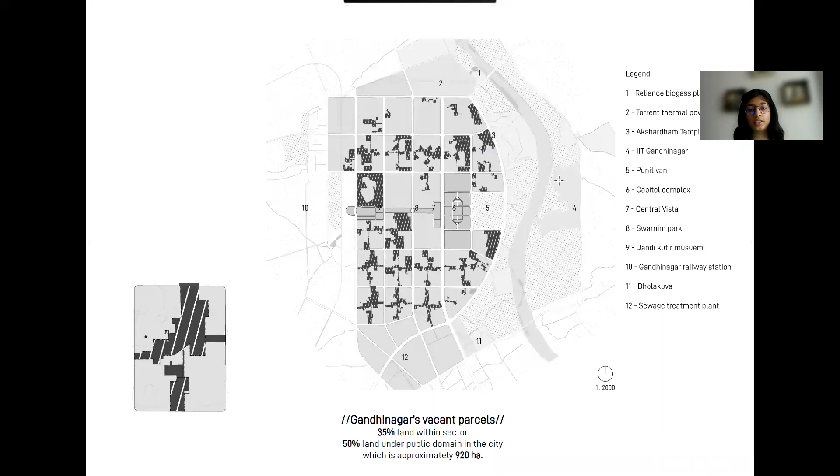As you can see in the map here, Gandhinagar has almost 50% of its land under public domain, and most of this land is clustered in the center. As per the Gandhinagar DP, all the public land within the sector is divided into 5 different zones: educational, religious, amenities, and green spaces, which comprise gardens and parks. However, it is not well defined what can come up within these zones.

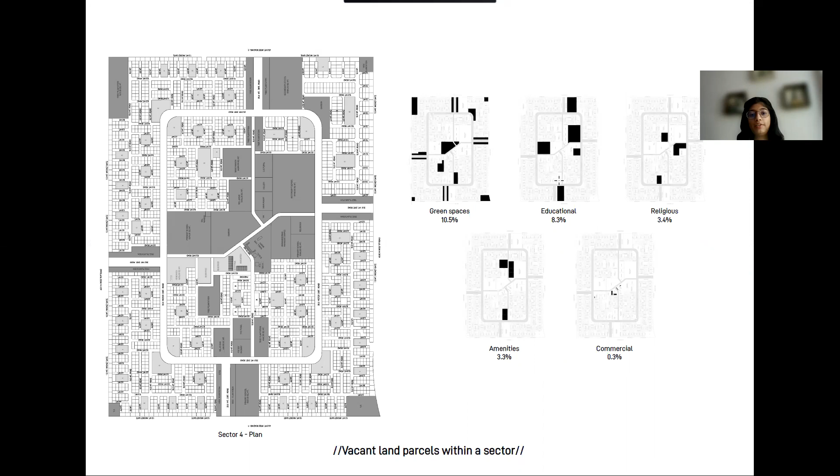To understand this better, I went to the parcels to see how they have been further developed. These are images from one of the most developed sectors, sector 4. If I look at these public lands, many of them are underutilized and sometimes even partially constructed, or they remain undefined in terms of their usages. Also, in many instances, the construction on this land was not more than 100 square meters, and the rest of the land lies barren and unutilized.

However, I also saw other inventive uses of public land by people themselves, which had me thinking: what if the zones currently allocated in the DP were different, or how these uses could themselves become clues for the development that was needed? For example, a sports ground developed by a local community on land intended for a different use, or spaces used for shelter by migrants. Similarly, I also saw vacant land utilized for food gardens and for grazing purposes. This also embeds clues of how to develop land creatively for people to utilize them.

So based on this understanding from the above usages, my concept was to define them better and expand on the current public land zoning. Therefore, the new updated zones are agricultural, ecological, cultural, social, and market. Under each zone, I have mentioned the kind of landscape as well as the supporting infrastructures that can be developed on these land parcels. For example, under the ecological zone, you have forests, parks, wetlands, or remediating landscapes which can be developed, and under supporting infrastructure you have seed banks or nurseries.

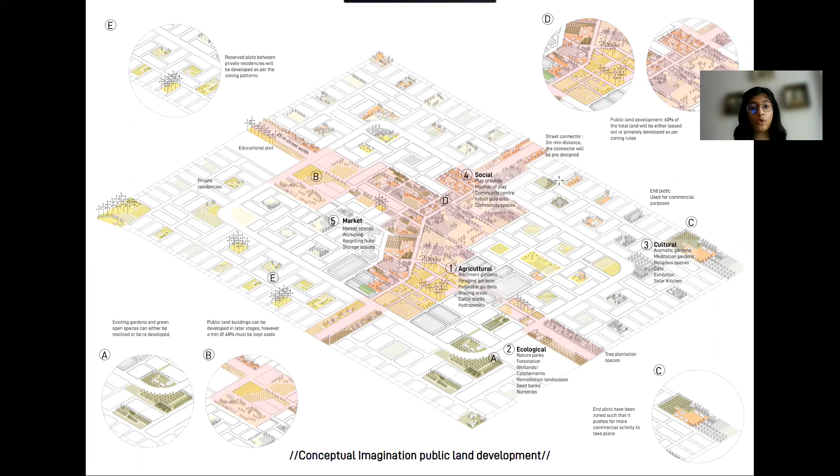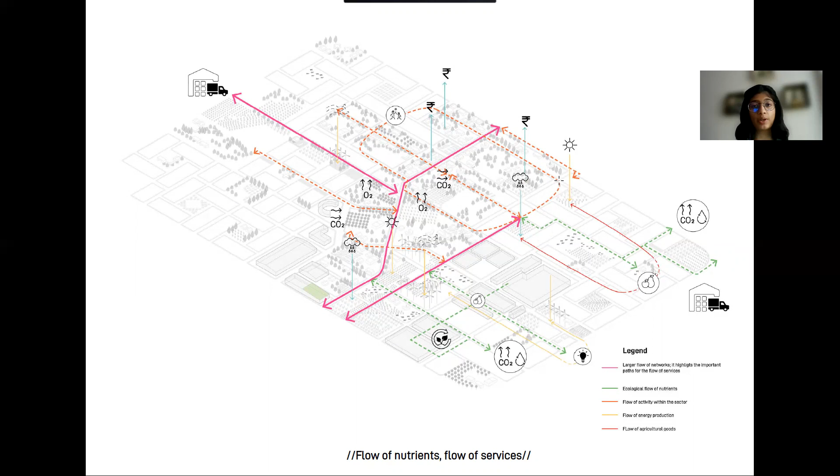So this is a conceptual view of the sector, which shows how and where the zones will be allocated. If this is further implemented, it can be useful in creating a cyclical loop of inputs and outputs, wherein waste from households could go into the allotments, produce could be sold locally into the market spaces, and ecological zones will further help in creating resilient infrastructure that supports different biodiversities while providing essential services.

To formalize this system, I have devised a model where people can have access to public land through a common resource pool. Under this model, all the public land within the sector will be deposited and can be dynamically viewed on the website. If a sector resident wants to cultivate for their own benefit, they can visit the website and lease the particular land parcel they wish, which is available.

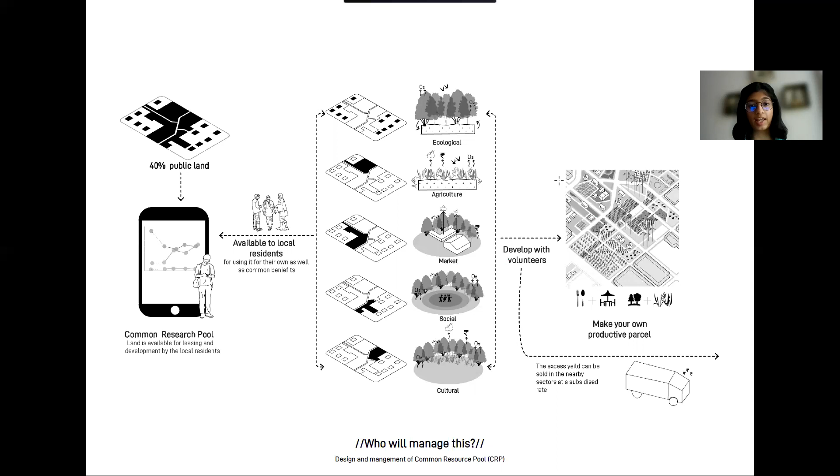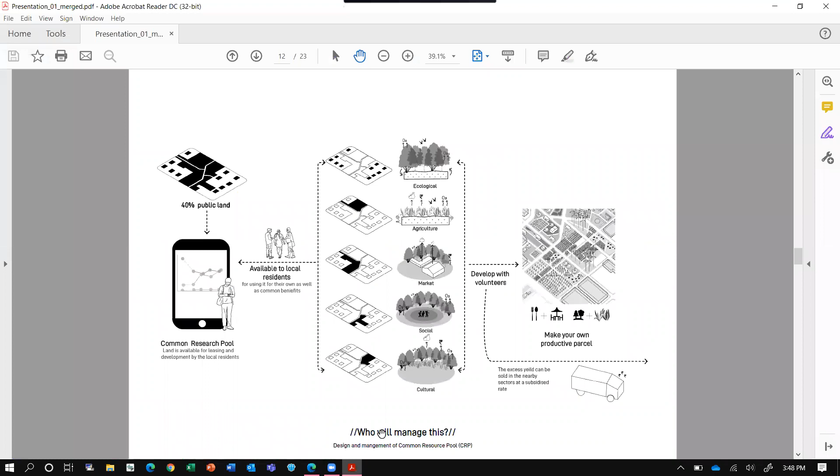Hence, a possible scenario is now imagined to speculate this development of public land within the sector. The existing public land within the sector has large block sizes, with the largest having 19,000 square meters allocated within it.

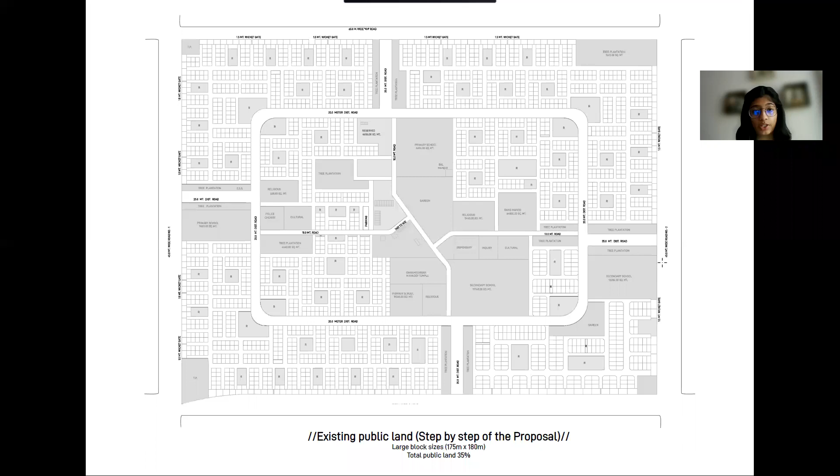Thus, the public land was first rearranged to ensure there were no cul-de-sacs, creating a more walkable precinct. The larger blocks were divided into smaller blocks to be developed.

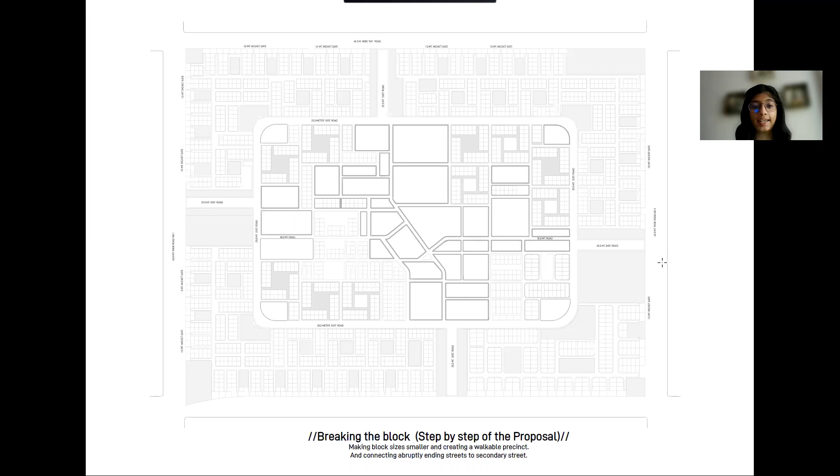Then a pedestrian infrastructure 2 meters wide was laid onto these public lands. This armature divided the block into smaller plots. As per the zoning, the uses were distributed. To ensure diversity, a larger piece might have a combination of 2 or more uses.

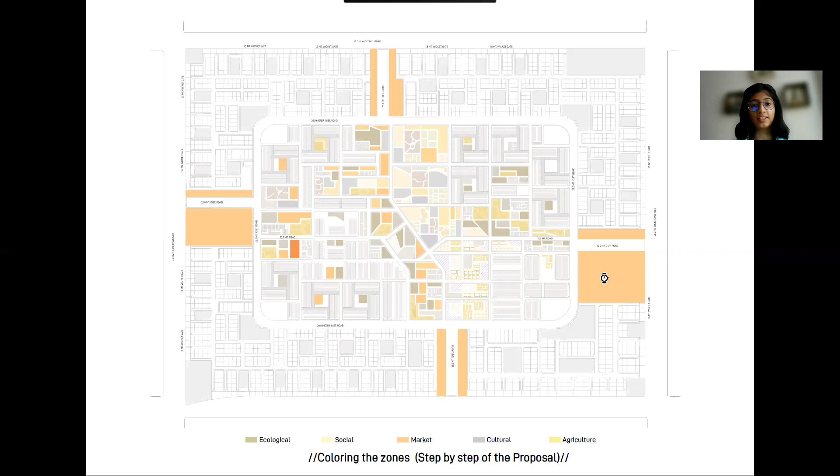The land parcels in the periphery will be utilized for public infrastructure such as schools, colleges, hospitals, markets, etc. To project a possible grain on these lands, they were further developed as per the uses allocated to them.

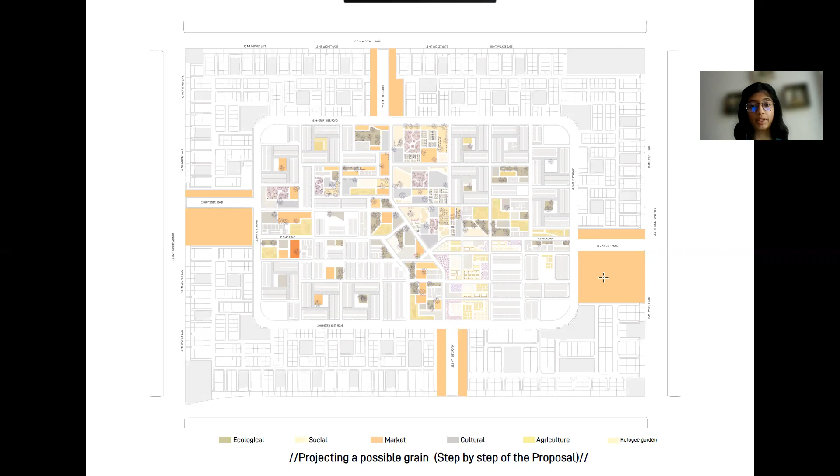Along with that, spaces within the public land were carved out for the migrant community. These spaces will be distributed across the public land in the sector. Lastly, you can notice there are also building typologies within these public zones, additional developments needed as per the zone's needs.

For example, in a market space, a resident can build a store. The maximum built-up area depends upon the plot size. However, it cannot exceed 40% of the total lot area, with a maximum frontage build-out of 50 to 60%. This ensures maximum area is dedicated to productive land use.

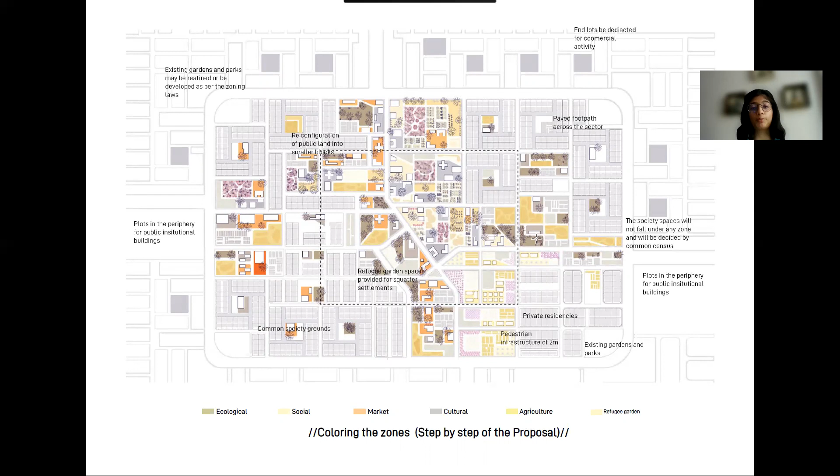Based on the land, one can avail any of these modular typologies for shaping the program - it could be a cafe, a barn, a solar kitchen, or even a small market space. These typologies ensure a certain character to the built form and have a light structure which can be dismantled when

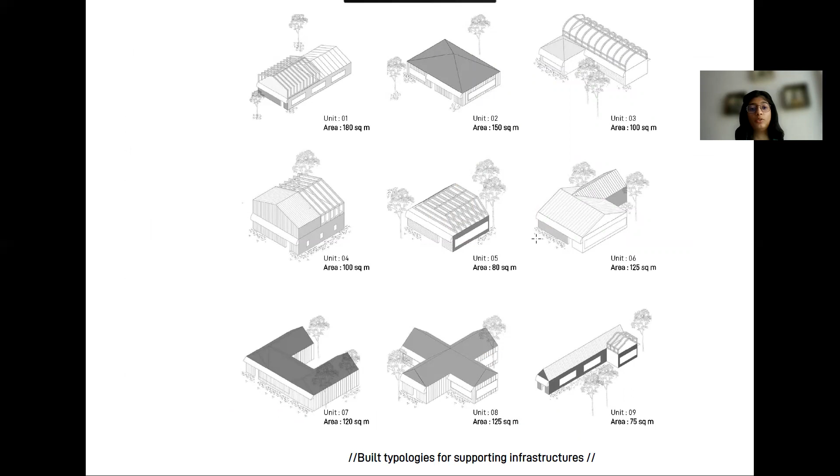the ownership changes. The S scale plan concentrates upon the built and urban context. One can see the architecture inside the built form as well as its adjacent open spaces in coherence.

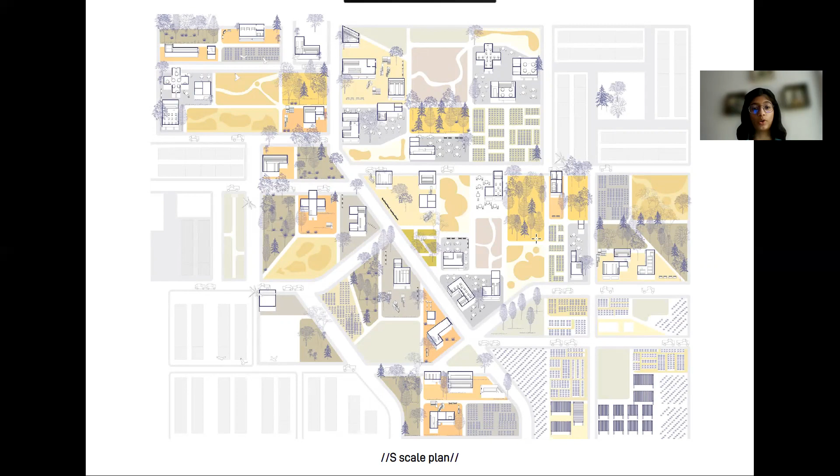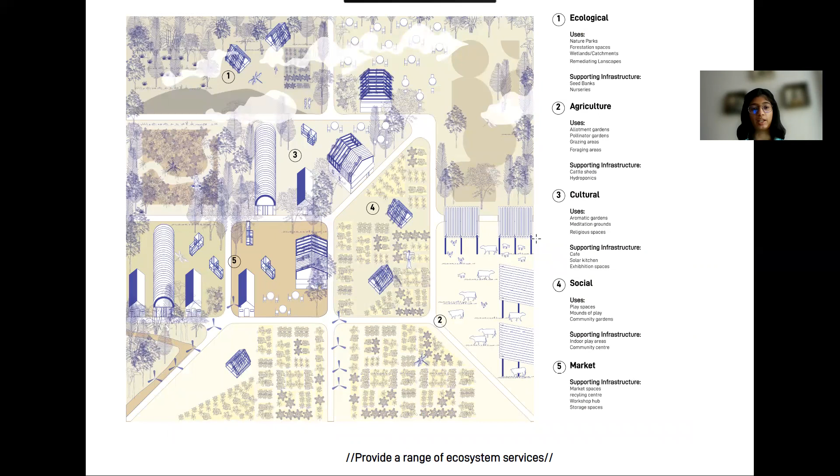The sector will also provide a range of ecosystem services as observed in this catalog. Each sub-use will provide necessary ecosystem services such as provisioning, regulatory, ecological, or cultural to its inhabitants with a multitude of benefits.